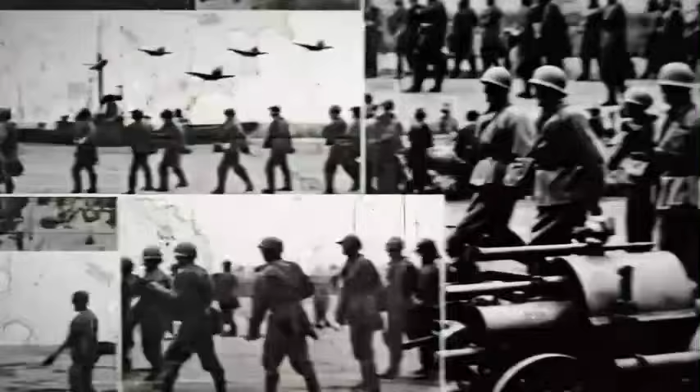It is the morning of October 14, 1943, a Thursday, and 291 B-17 Flying Fortresses are climbing into the cold air over East Anglia and turning east toward Germany. Their target is a small Bavarian city of 50,000 people named Schweinfurt, 400 miles deep inside the Reich, and the men flying toward it have been told that the factories clustered in that city are one of the most important targets in all of Germany.

Not the aircraft plants, not the oil refineries, not the tank works, the ball-bearing factories. The 5 plants at Schweinfurt produced something close to half of all the ball bearings in Nazi Germany, and the planners of the combined bomber offensive had become convinced that the ball bearing was the secret weak point of the entire German war machine, the single small component on which everything else depended. Destroy the ball bearings, the theory went, and the tanks and the aircraft and the engines and the guns would all grind to a halt.

Because every one of them was full of ball bearings, and without ball bearings, nothing that spun could spin. By the end of that day, 60 of those 291 bombers would not come home. 600 American airmen would be dead, captured, or missing. The Americans would call it Black Thursday, and it would be one of the costliest single days in the history of the United States Army Air Forces, a catastrophe so severe that it would halt the deep daylight bombing of Germany until a long-range escort fighter could be found to protect the bombers.

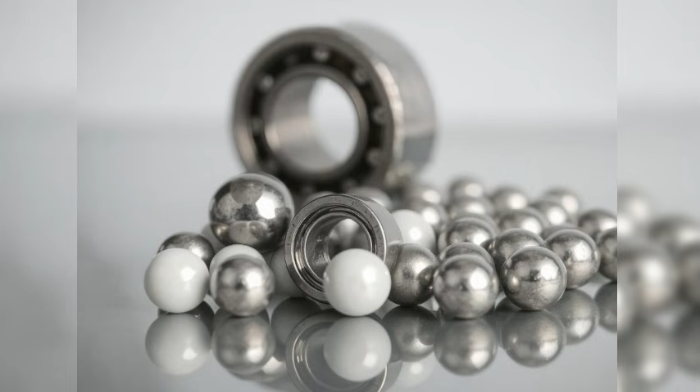The answer is one of the quiet triumphs of American engineering, and it begins with a riddle about the nature of the ball bearing itself. To understand why the Allies sent 600 men to die over Schweinfurt, you have to understand the near-religious faith that the modern industrial world placed in the ball bearing.

The ball bearing is one of those inventions so fundamental, so ubiquitous, and so hidden that almost nobody thinks about it. And yet by the middle of the 20th century, virtually every machine that contained a rotating shaft contained ball bearings. The German aviation industry alone consumed something on the order of 2.5 million bearings every month. Aircraft engines, tank transmissions, gun turrets, superchargers, propeller hubs, electric motors, machine tools, the very lathes and grinders that made all the other weapons, all of them spun on ball bearings or their close cousins, roller bearings.

The ball bearing had become the universal joint of industrial civilization, the small round thing that allowed everything else to turn. This ubiquity was exactly what made it such a tempting target. The Allied planners reasoned, with a logic that seemed irrefutable, that if every machine needed ball bearings, and if German ball bearing production was concentrated in a handful of factories in one small city, then destroying those factories would create a bottleneck that would strangle the entire German war economy.

It was the theory of the choke point, the single critical node whose destruction collapses the whole network. And the ball bearing seemed like the perfect choke point, because it was everywhere, because it was essential, and because it was concentrated. Albert Speer, the German armaments minister, would later admit that he had been genuinely frightened by the Schweinfurt raids, that he had warned that sustained attacks on the ball-bearing industry could cripple German armament production within months.

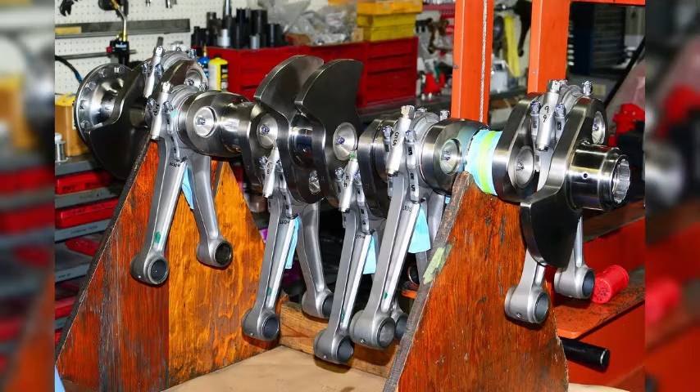This is the paradox this story is built on. The entire strategic logic of the Schweinfurt raids rested on the premise that the ball bearing was irreplaceable, that no machine of war could function without it. And yet the single most important machine in the air battle over Schweinfurt, the piston aero engine, the Wright and the Pratt and Whitney radials in the bombers, the Allison and the Packard-built Merlin in the fighters, did not use ball bearings for its most critical, most heavily loaded function.

The crankshaft of an American fighter engine, the spinning steel heart of the whole machine, the shaft that absorbed the colossal hammer blows of a dozen cylinders firing thousands of times a minute, did not ride on ball bearings. It rode on plain bearings, smooth curved shells of metal with no balls, no rollers, no moving parts at all.

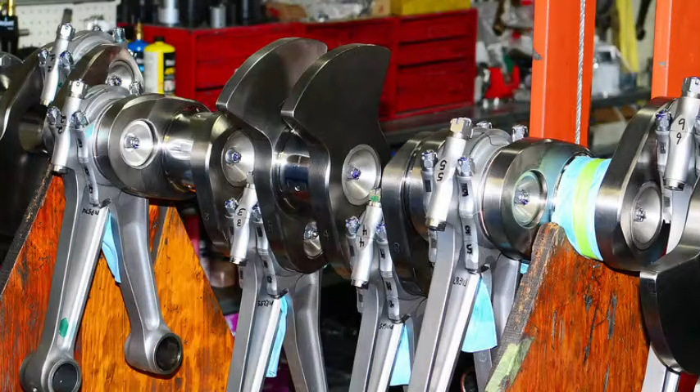The resolution of the paradox is a piece of engineering physics so elegant that it seems almost like a trick. It turns out that for the specific, brutal job of supporting a crankshaft, the ball bearing is not the best solution at all. It is, in fact, a rather poor one. The best solution is the plain bearing, and the plain bearing works on a principle so counterintuitive that it took engineers decades to fully understand it.

In a properly working plain bearing, the spinning shaft never actually touches the bearing at all. It floats, suspended on a microscopically thin film of pressurized oil, riding on a cushion of liquid that the shaft's own rotation creates and sustains. The crankshaft of a Merlin engine, turning 3,000 times a minute, carrying loads of tons, is held away from the metal of its bearings by a film of oil thinner than a human hair, and the metal never touches metal at all. This is the secret.

This is how you build an engine without ball bearings. You float the crankshaft on oil. And the story of how American and British engineers perfected this, of the materials they developed and the manufacturing they mastered, is the story of how the Allies built the engines that won the air war without depending on the very component they were trying to bomb out of existence.

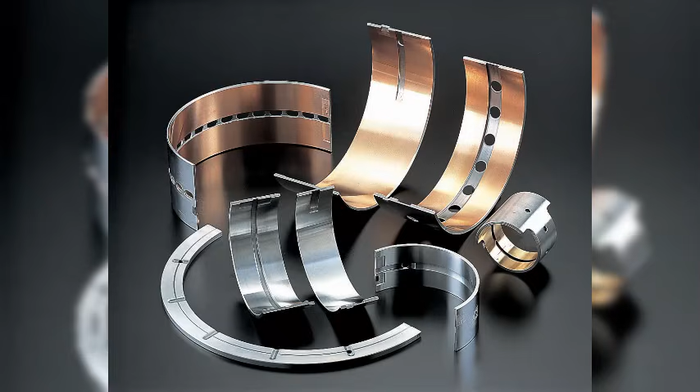The popular history of the air war remembers Schweinfurt as a story of sacrifice and of the limits of strategic bombing, the costly raids that proved bombers could not survive deep over Germany without escort. It remembers the ball bearing as a kind of tragic obsession, the choke point that turned out not to be a choke point, because the Germans dispersed their production and drew on their stockpiles and kept their machines turning.

What the popular history almost never mentions is the other half of the story, the engineering half. The fact that the bearings that mattered most in the Allies' own war machine were not ball bearings at all, and that the mastery of the plain bearing was one of the unsung industrial achievements that made the Allied air forces possible. This omission is understandable because the plain bearing is the least glamorous component imaginable.

It is a curved sliver of metal, a shell, a shim. It has no moving parts. It does its work in the dark, deep inside the sealed crankcase of an engine, invisible and silent, floating a crankshaft on a film of oil.

Nobody photographs it. No raid was ever flown to destroy it, because it could not be concentrated in a single city, because making it required not a specialized ball-bearing industry, but the ordinary metallurgical and machining skills that were spread across the entire American manufacturing economy.

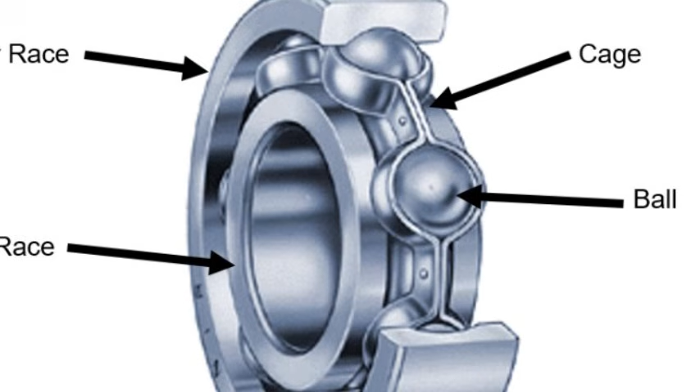When the shaft turns, the balls roll between the two races, and rolling, as humanity discovered when it invented the wheel, is vastly easier than sliding. The genius of the ball bearing is that it replaces sliding friction with rolling friction, and rolling friction is tiny. A shaft on ball bearings spins almost freely, with very little resistance, very little heat, and very little wear, as long as the bearing is clean and properly loaded. This is why the ball bearing conquered the industrial world.

For a shaft that needs to spin fast and freely with minimal friction, a shaft in an electric motor, a machine tool spindle, a supercharger impeller, a wheel, the ball bearing is close to ideal. It supports the shaft precisely, it lets it spin with almost no drag, and it requires only modest lubrication. The roller bearing, its cousin, replaces the balls with cylindrical rollers, spreading the load over a line of contact rather than a point, allowing it to carry heavier loads. Together, ball and roller bearings, the rolling element bearings, became the universal solution to the problem of the rotating shaft, and the industry that made them became one of the foundations of modern manufacturing.

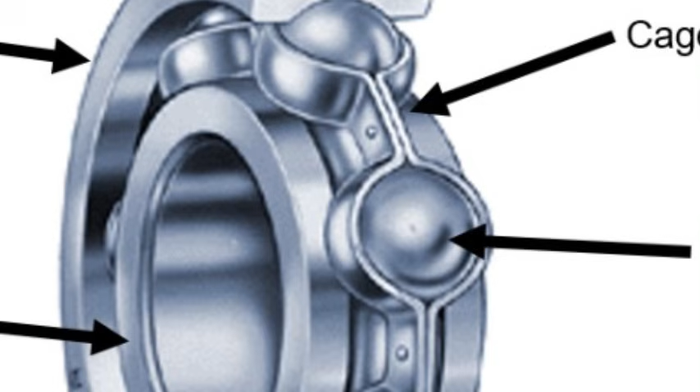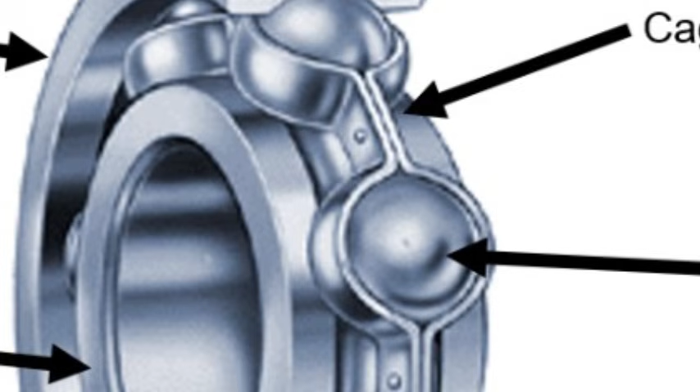It was a genuinely superb technology, and the Allied planners were not wrong to see it as essential. They were only wrong about one thing. They assumed that because the ball bearing was the best solution for so many rotating shafts, it must be the best solution for all of them. And the crankshaft of a piston engine is the great exception, the place where the ball bearing fails and something else must take its place. Here is why the ball bearing, so perfect for so many things, is wrong for a crankshaft. And understanding this is the key to the whole story.

The problem is the nature of the load. A ball bearing carries its load through the tiny points where the balls touch the races. Each ball contacts the inner race and the outer race at a single, microscopically small point, and all the force passing through the bearing is concentrated at those points. As long as the load is steady and moderate, this is fine.

But a crankshaft does not deliver a steady, moderate load. It delivers a savage, pounding, cyclic load, a series of violent hammer blows. Every time a cylinder fires, the explosion drives the piston down with a force of tons, and that force slams through the connecting rod into the crankshaft and then into the bearing. A sharp, sudden impact, repeated for every cylinder, thousands of times every minute. In a V12 like the Merlin, turning 3,000 revolutions a minute, the bearings absorb tens of thousands of these hammer blows every minute, hour after hour.

A ball bearing, asked to carry this load, would destroy itself. The concentrated point contacts where the balls meet the races would be pounded by each impact, and the metal at those points, subjected to that relentless hammering, would begin to fatigue and crack and spall, flaking apart under the cyclic stress. The hardened steel of the races would brinell, develop tiny dents at each ball position from the pounding, and once the smooth race was dented, the bearing would roughen and fail.

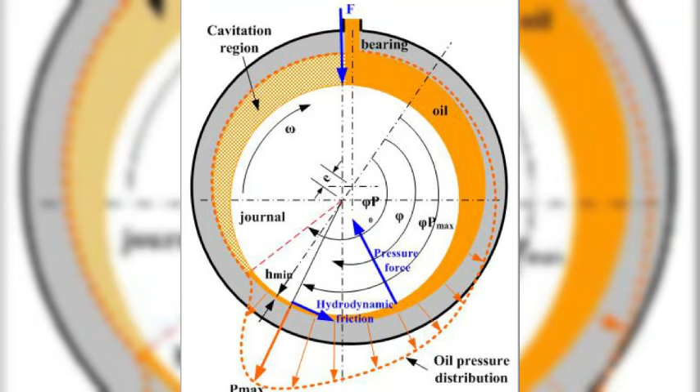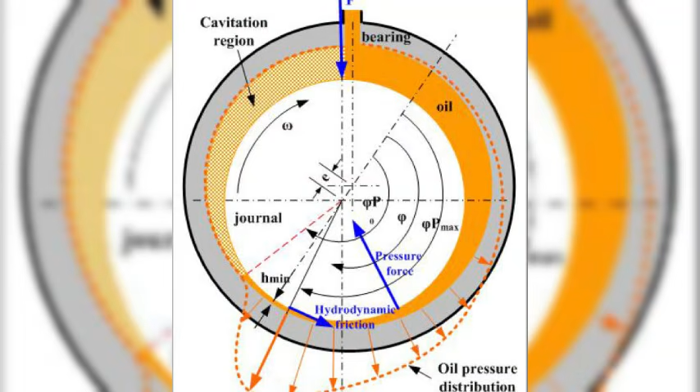A plain bearing is, at first glance, almost absurdly simple. It is just a smooth, curved shell of metal, wrapped most of the way around the crankshaft journal, with a small clearance between the bearing and the shaft, a few thousandths of an inch.

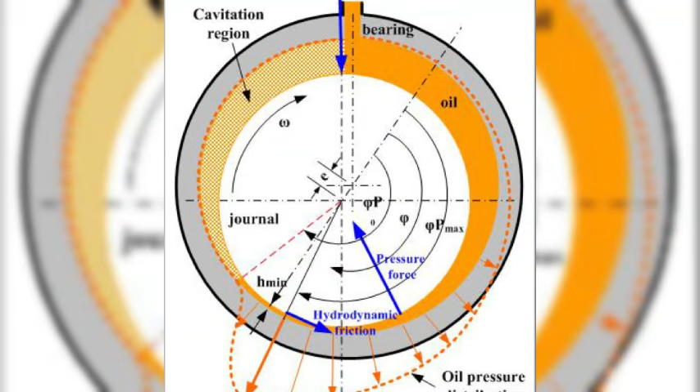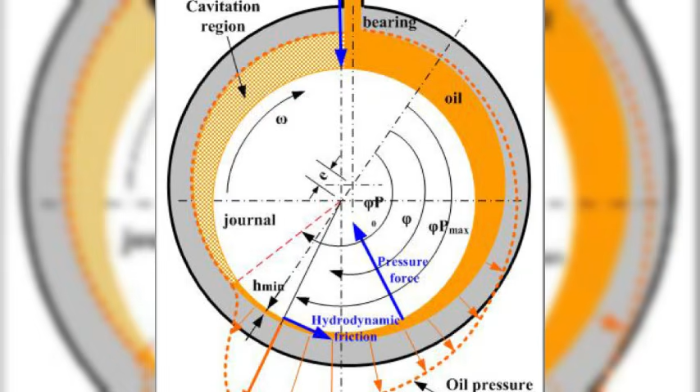There are no balls, no rollers, no moving parts. The shaft simply turns inside the smooth metal sleeve. And if that were all there was to it, the bearing would be a disaster because metal sliding directly on metal generates enormous friction and heat and would seize and weld itself solid in seconds.

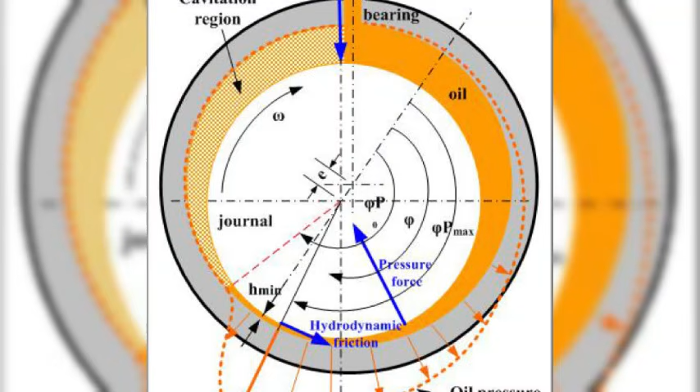The plain bearing does not work by sliding metal on metal. It works by never letting the metal touch at all, and the thing that keeps them apart is oil. Here is the physics, and it is genuinely beautiful.

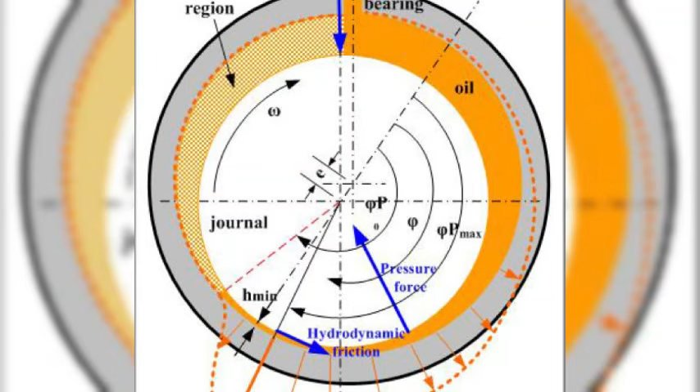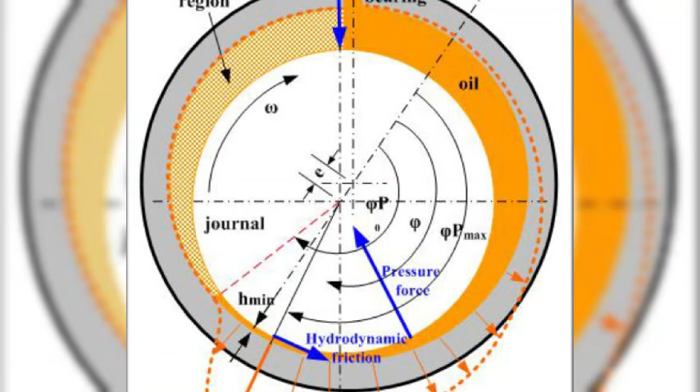Oil is pumped into the small clearance between the shaft and the bearing under pressure. As the shaft begins to turn, it does something remarkable. It drags a layer of oil around with it, because oil clings to the surface of the spinning shaft.

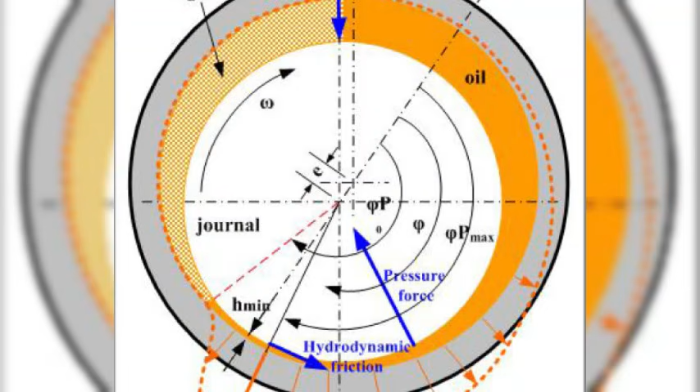And because the shaft sits slightly off-center in the bearing under load, resting a little closer to the bearing on the loaded side, the gap between the shaft and the bearing is wedge-shaped, narrowing on the side where the load presses. The spinning shaft drags oil into this narrowing wedge, and as the oil is forced into the ever smaller gap, its pressure rises enormously.

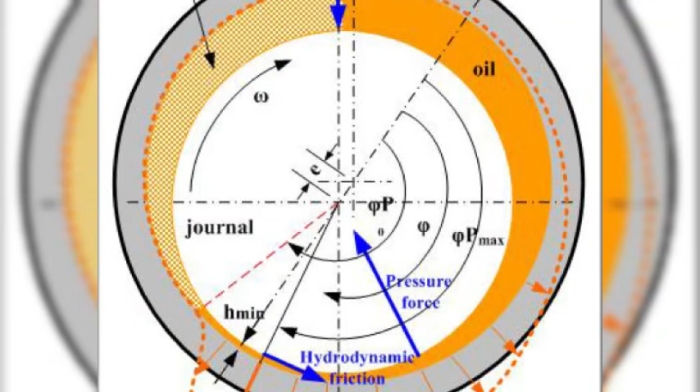The faster the shaft spins, the more oil it drags into the wedge, and the higher the pressure climbs, until the pressure of the oil film in the wedge is great enough to support the entire load on the bearing, to actually lift the shaft and hold it away from the metal.

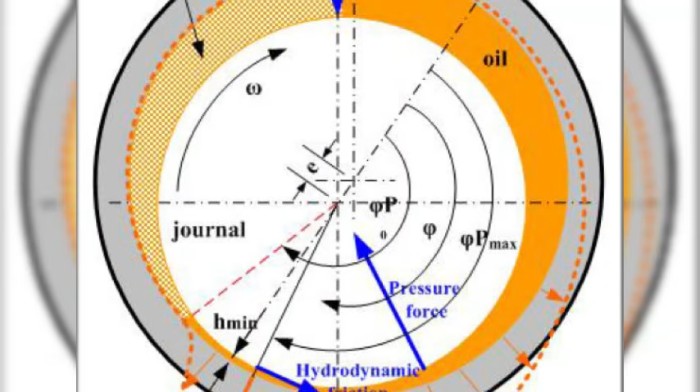This is called hydrodynamic lubrication, and the effect is that the spinning shaft floats on a self-generated wedge of pressurized oil, riding on a film thinner than a human hair, never touching the bearing metal at all. The rotation creates the pressure, and the pressure carries the load.

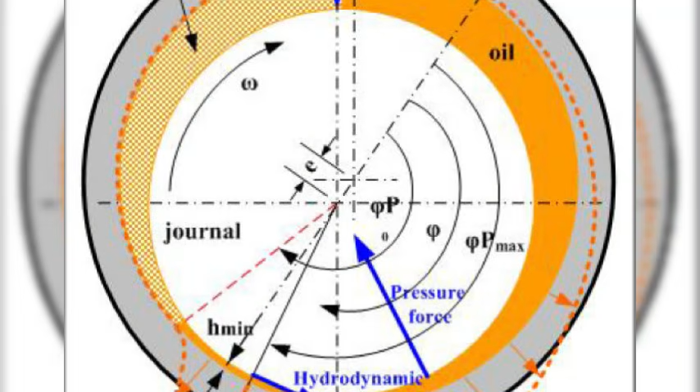The shaft does not slide on the bearing. It hydroplanes on a film of oil that its own motion creates. This is why the plain bearing can take loads that would destroy a ball bearing.

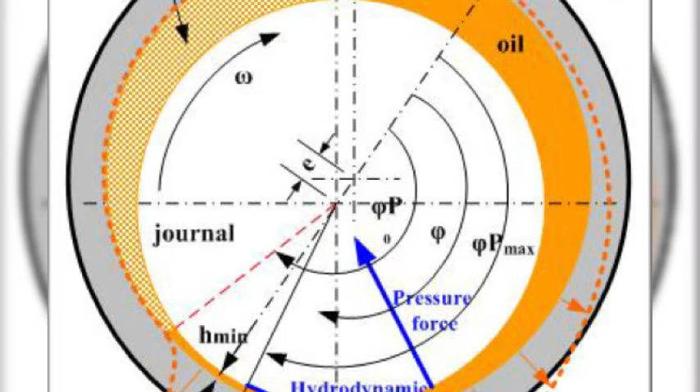The load is not carried at tiny points of metal contact. It is carried over the entire broad area of the oil film, spread across the whole curved surface of the bearing, cushioned by a layer of liquid that absorbs the hammer blows of combustion like a shock absorber. The pounding cyclic load of the crankshaft, which would brinell and crack a ball bearing's races, is simply soaked up by the oil film, distributed over a large area and damped by the give of the liquid.

The plain bearing turns the crankshaft's savage impacts into a steady pressure on a cushion of oil. It is, when you understand it, a far more elegant solution to the crankshaft problem than any rolling bearing could ever be. And it requires no specialized ball bearing industry to produce.

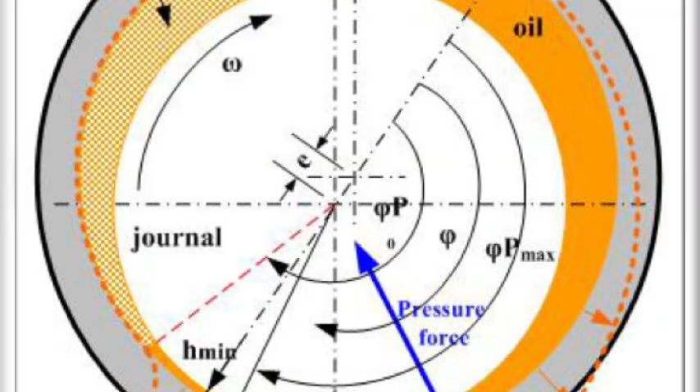It requires only a precisely made metal shell, the right soft metal on its surface, and a steady supply of oil under pressure. The oil film does most of the work, but it does not do all of it, and this is where the metallurgy becomes critical and where the real engineering challenge of the plain bearing lies.

The oil film carries the load when the shaft is spinning at speed, but there are moments when the film fails, when metal does touch metal, and the bearing surface has to survive those moments. When the engine first starts, before the oil pressure has built up, the shaft rubs directly on the bearing.

When the engine is shut down and the oil drains away, the shaft settles onto the bearing. Under extreme loads, the film can be momentarily squeezed thin enough that the high points of the metal touch. And throughout the engine's life, tiny particles of grit and metal debris circulate in the oil, particles that can score and gouge a bearing surface.

The bearing metal has to be able to survive all of this, and the properties it needs are a remarkable and almost contradictory set. It has to be soft enough to be forgiving. When a hard particle of grit comes through with the oil, the bearing surface needs to be soft enough that the particle embeds itself into the bearing metal and buries itself harmlessly, rather than being dragged across the precious hardened steel of the crankshaft journal and scoring it.

This property is called embeddability, and it is why bearing surfaces are made of soft metals. The surface also needs to be conformable, soft enough to deform slightly, and adjust to tiny misalignments between the shaft and the bearing, spreading the load evenly rather than concentrating it.

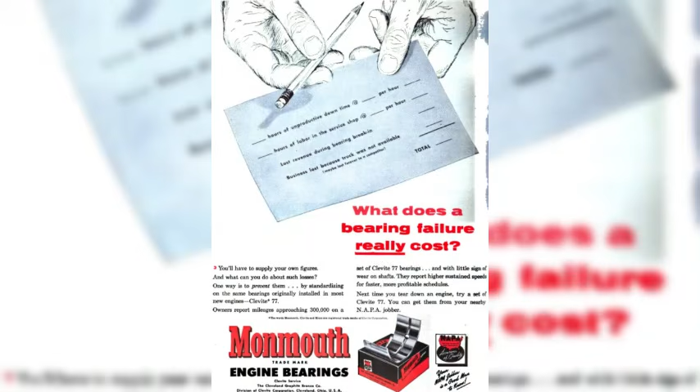These two demands pull in opposite directions, and the entire history of bearing metallurgy is the history of trying to satisfy both at once. The earliest solution to this problem was a soft white metal called babbitt, an alloy mostly of tin with some antimony and copper, invented in the 19th century.

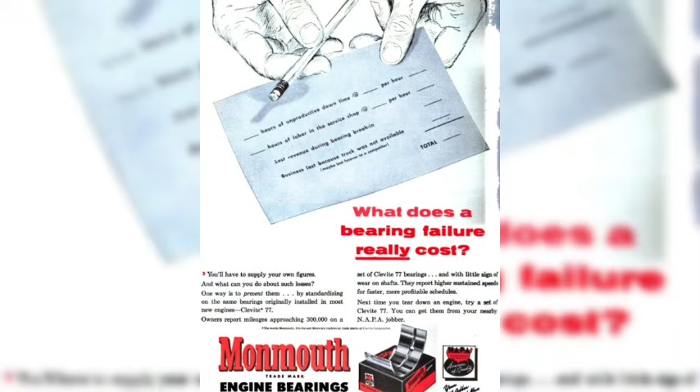Babbitt is wonderfully forgiving. It is soft. It embeds grit beautifully. It conforms. It resists galling. It is an almost perfect bearing surface in terms of softness.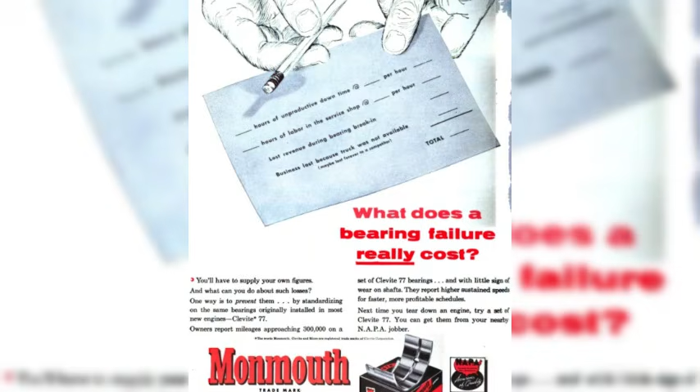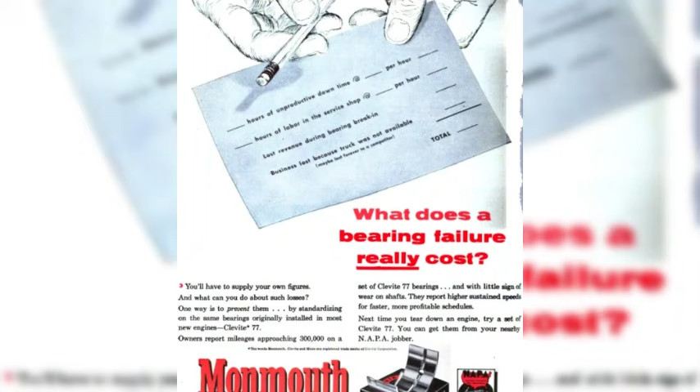The old way of making a bearing was to pour molten babbitt into the bearing housing and then scrape and fit it by hand to the shaft. A slow, skilled craft process. And for low-speed, lightly loaded engines, babbitt was fine.

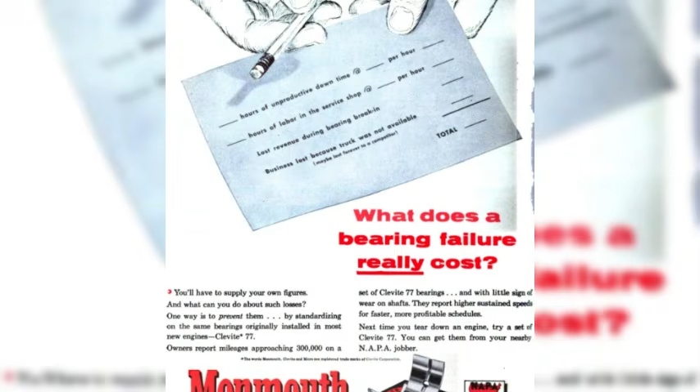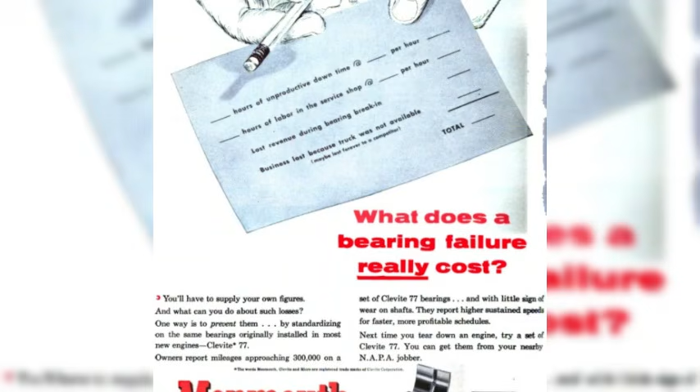But babbitt has a fatal weakness for a high-performance engine. It is soft all the way through, and being soft all the way through, it lacks fatigue strength. Under the heavy pounding loads of a powerful engine, a thick layer of babbitt would fatigue and crack and break up. The very softness that made it forgiving made it weak.

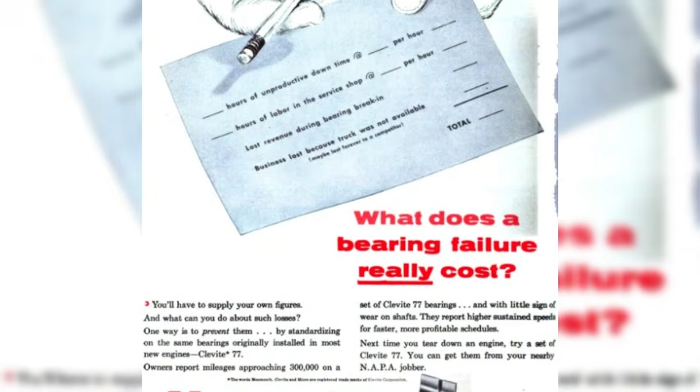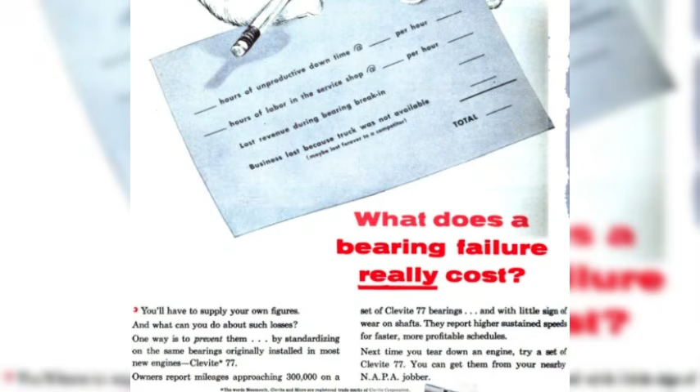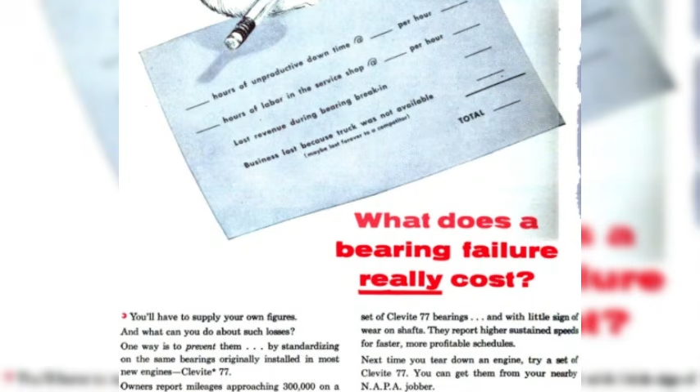The breakthrough, the innovation that made the modern high-performance plain bearing possible, was the thin-shell precision bearing, and it changed everything. Instead of a thick layer of soft metal, the engineers made a bearing out of a strong steel backing shell, a curved piece of steel that provided all the structural strength and fatigue resistance, and then bonded to the inside of that steel shell only a very thin layer of the soft bearing metal, a layer sometimes only thousandths of an inch thick.

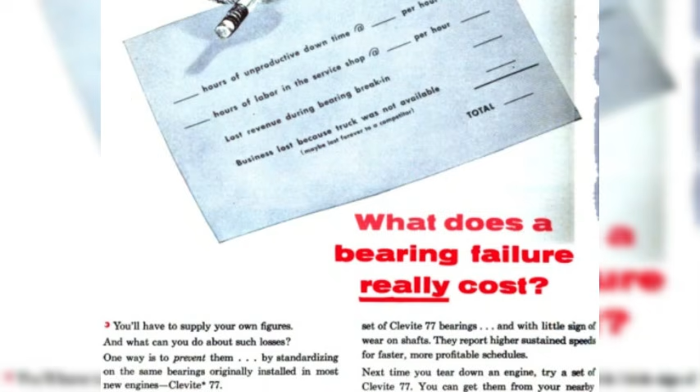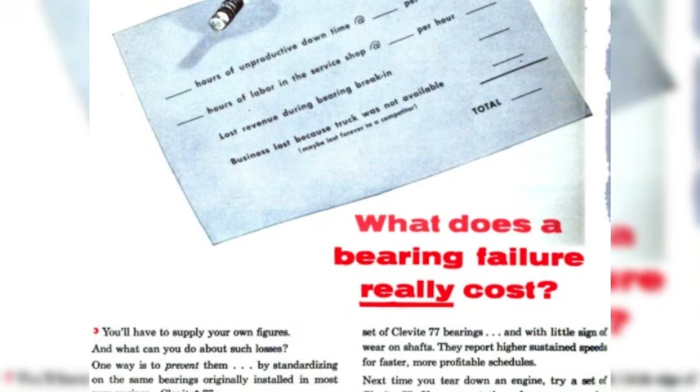The thin, soft layer provided the forgiving surface properties, the embeddability and conformability, while the steel backing carried the load and provided the fatigue strength. Because the soft layer was so thin, bonded firmly to the rigid steel behind it, it could not flex and fatigue the way a thick layer did.

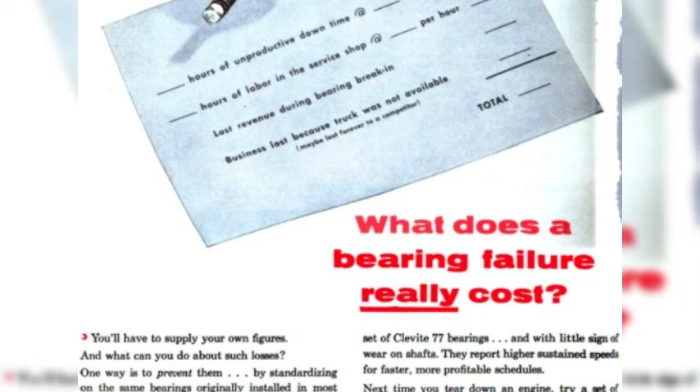The thin shell gave you both things at once, the soft surface and the strong structure, by separating them into two layers. And crucially, the thin shell bearing could be mass-produced, stamped, and machined to precise dimensions as a finished part that simply dropped into the engine, eliminating the slow hand scraping of the old babbitt bearings.

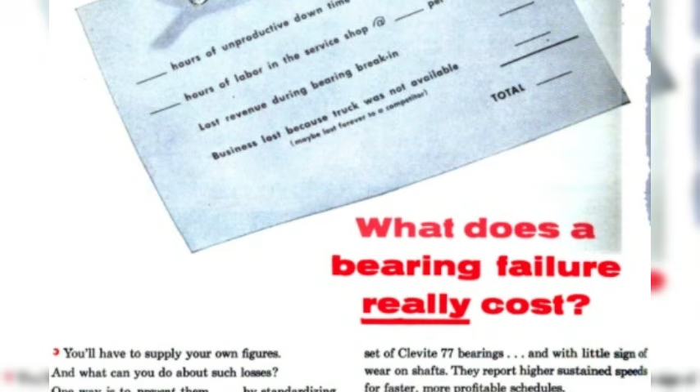The precision thin shell bearing, pioneered in America by companies like the Cleveland Graphite Bronze Company with its thin wall steel-backed bearings, was the foundation on which the high-performance aero engine bearing was built. It made the bearing both strong and forgiving, and it made it manufacturable in the millions.

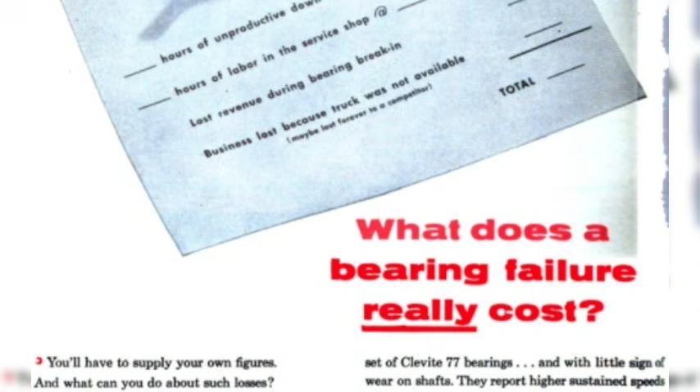The thin shell solved the structural problem, but the question of exactly what soft metal to put on its surface remained, and as engines grew more powerful through the late 1930s and into the war, the demands on that surface grew beyond what babbitt could meet.

The Rolls-Royce Merlin, in its early forms, used a bearing surface of lead bronze, a copper-lead alloy bonded to a steel shell, which was stronger than babbitt and could take higher loads. But as the Merlin's power climbed, as it went from 1,000 horsepower to 1,500 and beyond, even lead bronze began to struggle, and the search was on for a bearing that could survive the loads of the most powerful versions of the engine.

It was in America, at Packard, which was building the Merlin under license to power the P-51 Mustang and other aircraft, that the definitive answer was perfected.

The American bearing was built in layers of extraordinary sophistication. Onto the steel backing shell, the engineers electroplated a layer of silver, around 40,000ths of an inch of pure silver, because silver is an outstanding bearing material, strong and an excellent conductor of heat, able to carry away the heat of the bearing.

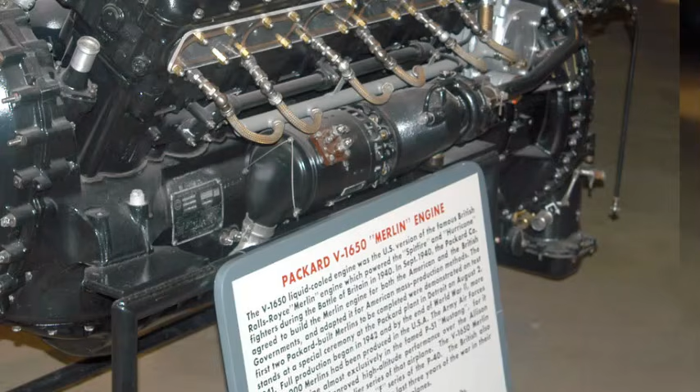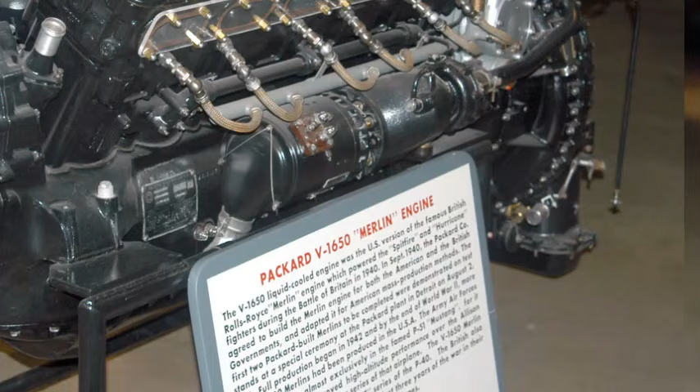When Packard took over Merlin production, one of its key modifications was exactly this, changing the main crankshaft bearings to the silver-lead indium combination, which improved the running-in and the load-carrying ability of the surface. The crankshaft of the P-51's engine, the fighter that would soon escort the bombers to Schweinfurt and beyond, floated on a film of oil held by bearings of silver and lead and indium, not a ball bearing in sight.

It is worth stopping to appreciate why this mattered at the level of grand strategy, because it transforms the plain bearing from an engineering curiosity into one of the quiet reasons the Allies could outproduce their enemies.

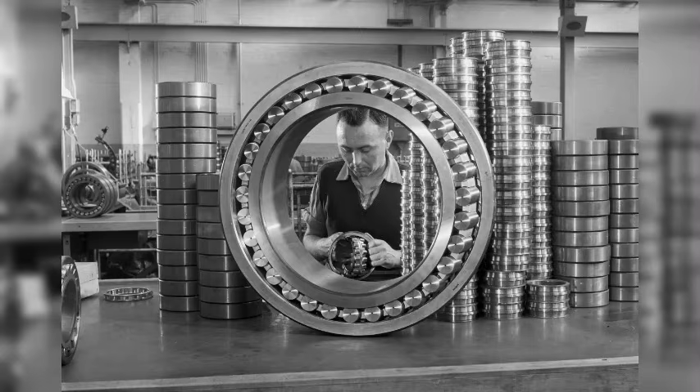The whole premise of the Schweinfurt raids was that bearing production was a choke point, a single, vulnerable node. And for the ball bearing, that was true, because making a precision ball bearing is genuinely difficult and specialized. It requires perfectly round, perfectly hardened, perfectly graded steel balls made to tolerances of millionths of an inch.

The machinery and expertise to make them was concentrated in a relatively small number of specialized plants. That concentration was what made the ball bearing industry bombable, what made Schweinfurt a target. The ball bearing was a choke point because it was hard to make and made in few places. The plain bearing was the opposite, deliberately unconcentrated in a sense.

Making a thin shell plain bearing required precision, yes, but it required the ordinary skills of stamping steel and electroplating metals and machining shells to close tolerances, skills that were spread throughout the entire American manufacturing economy in hundreds of plants, not 5. There was no Schweinfurt for plain bearings, no single city whose destruction would halt their production, because they were made everywhere. The Allied aero engine, by running its most critical bearings on plain bearings rather than ball bearings, had reduced its dependence on the one component that was concentrated and vulnerable, and shifted that dependence onto a component that was dispersed and resilient.

This was not a deliberate strategic choice, exactly. The engineers used plain bearings on crankshafts because plain bearings were the right tool for the crankshaft, for all the reasons of physics we have explored. But the strategic consequence was real and enormous.

The Allies could not have their engine production strangled by a bearing choke point, because their engine's core bearings were not the bearings that could be choked. The very thing the Allies were trying to do to Germany at Schweinfurt, to find and destroy the bearing choke point, could not have been done to the Allied engine industry, because that industry had, without quite intending to, designed the choke point out.

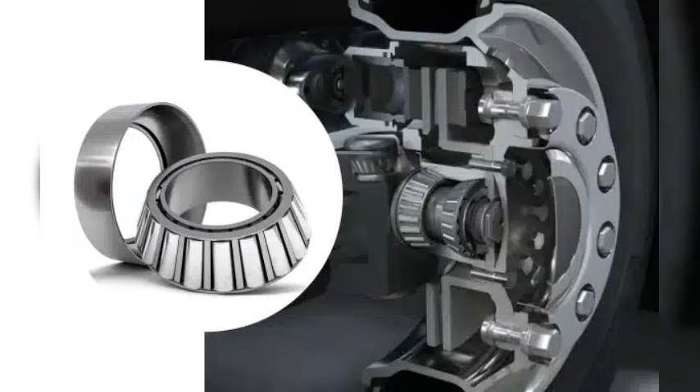Honesty requires a clarification, because the title of this story is a deliberate provocation, and the truth is more precise and more interesting than the slogan. America did not build planes entirely without ball bearings.

A complete aircraft is full of rolling element bearings. The wheels turn on tapered roller bearings. The supercharger impeller, spinning at tens of thousands of revolutions a minute, rides on bearings. The magnetos and the generators and the starter motors have ball bearings supporting their rotors. The propeller reduction gear at the front of the Merlin uses roller bearings, and the propeller shaft itself takes its thrust on a ball bearing. The variable pitch propeller blades pivot on large ball bearings. There are rolling element bearings throughout the aircraft.

And the Allies, like everyone else, needed a robust bearing industry to supply them, which is one reason the loss of bearing supply would have hurt the Allies too, had it ever been seriously threatened. The precise truth, the defensible and remarkable truth, is this: the single most critical, most highly loaded, most failure-intolerant bearings in the entire aircraft, the bearings that supported the crankshaft and the connecting rods, the bearings on which the whole engine, and therefore the whole aircraft, depended, were not ball bearings. They were plain bearings, floating the crankshaft on a film of oil, and they did a job that no ball bearing could have done. And because they were plain bearings, the heart of the engine was free of the one component that the Allies believed and hoped was the great vulnerable choke point of industrial war.

Here is how you build a plane whose engine runs without ball bearings. You understand the physics of the oil film. You master the metallurgy of the soft, forgiving surface on the strong steel back, and you float the crankshaft on a wedge of pressurized oil that its own spinning creates. That is how. The lesson of this story reaches beyond bearings into the nature of industrial resilience and the difference between a choke point and a distributed strength.

The Allied planners went to Schweinfurt looking for the choke point, the single vulnerable node whose destruction would collapse the enemy's war machine, and they paid a terrible price discovering that the ball bearing, for all its ubiquity, was not the choke point they imagined, because an industry can disperse and substitute and adapt in ways that a planning map does not show.

The deeper lesson is in the contrast between the two kinds of bearing. The ball bearing was concentrated, specialized, hard to make, made in few places, and therefore vulnerable. The plain bearing was dispersed, made of ordinary skills, spread across the whole economy, and therefore resilient, no choke point at all. There is a principle here that engineers and strategists alike keep relearning: the most robust system is often not the one built around the single best component, but the one whose critical

functions do not depend on any single concentrated, vulnerable thing. The engineers who chose plain bearings for the crankshaft did not choose them for strategic resilience. They chose them because the physics of the oil film made them the right tool for the crankshaft's brutal cyclic loads. But the strategic resilience came along with the engineering correctness, as it so often does, because good engineering tends to produce robustness as a byproduct.